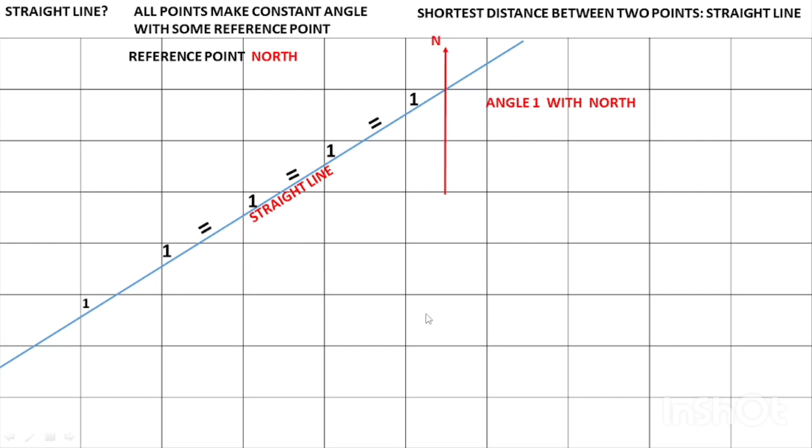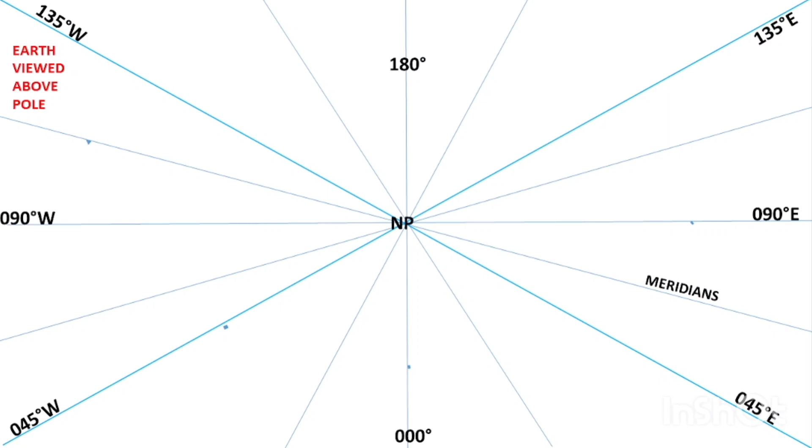If you are viewing the earth from above the north pole, it will appear something like this to you. You'll see the north pole and then all the meridians converging to the pole, because all meridians converge at the pole, and the parallel of latitude, which is a small circle, will be seen something like this.

I'm just taking some arbitrary points here. Point A I have taken as 50 degrees north parallel of latitude, and 135 degrees west longitude. Another point B, which is on the parallel of latitude of 30 degrees north and 135 degrees east.

The shortest distance is a straight line, so I'm drawing a straight line here. But if you look at it now, all the angles with north are different, they're not the same. So, as we just talked about, a straight line should be having a constant angle with north. So this is not a straight line.

So basically, it is not possible to draw a straight line on the surface of the earth. What you are drawing as a straight line is actually a curve. And the shortest distance now is on this curve, which is the arc of a great circle. A great circle basically is one which has got the maximum possible radius. So the shortest distance we can cover between 2 points is the arc of a great circle.

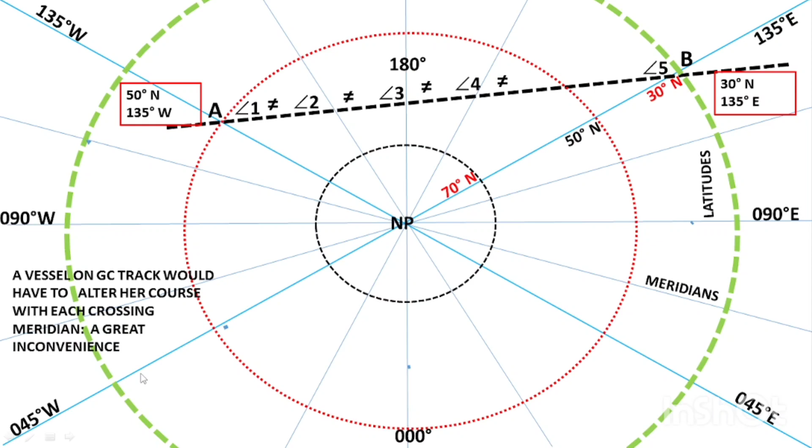Though there is an inconvenience in sailing along a great circle track, because you'll have to keep on altering your course with each meridian. As you keep on crossing each meridian, you'll have to keep on altering your course. But the considerable saving in distances overrides the inconvenience caused here. So you follow a great circle track when you are doing long distance sailing, to save on time and distance.

Now great circle sailing is a solution of an oblique spherical triangle, which is formed by the great circle track what you have drawn here. You have decided to sail between 2 points, and the meridians which pass through the 2 points which you are sailing between. So all the solutions for great circle sailing will involve solving a spherical triangle.

So solving of great circle sailing involves solving of oblique spherical triangles. And what is a spherical triangle? These are formed by the intersection of three great circles. Now, in this particular case, when we're talking about great circle, one of the sides of the triangle is the great circle track which we intend to follow between 2 points.

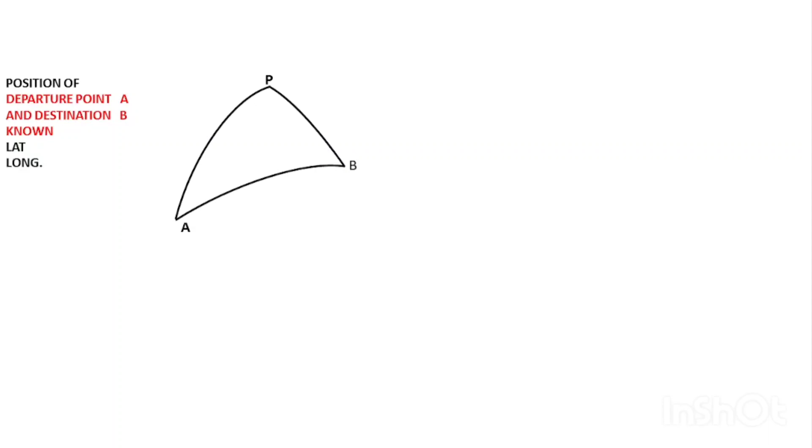Here, these are the 2 points which I've got, with the great circle passing through them. One side of the triangle is the side which we intend to follow, and the other two sides are made by the meridians which pass through these 2 points, A and B. And then we know the position of our departure, we know the position of our destination, that is our latitude and longitude.

Now, latitude we know is the arc of the meridian, contained between the equator and the place. So from equator to A is your latitude, and we know that from pole to equator is 90 degrees. So what is PA? PA is 90 minus latitude, right?

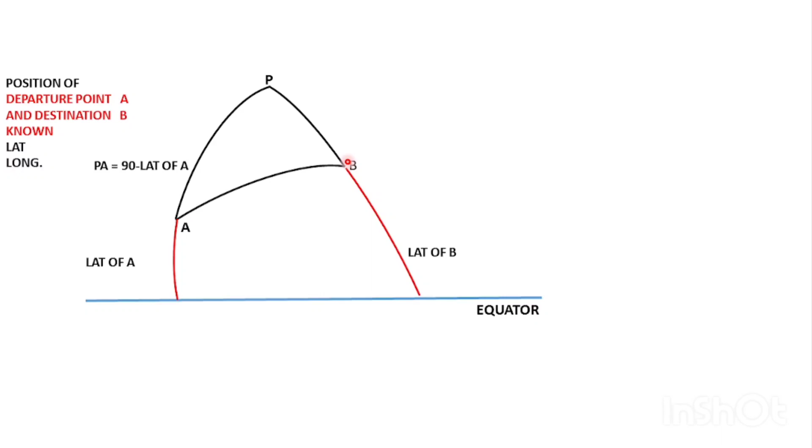Similarly, we know the latitude of B, which is from equator to B. So PB would be 90 minus the latitude of B.

This angle P, what we are seeing here, is the angle between the two meridians passing through A and B. So that is the D long between the two meridians. So angle P is the D long.

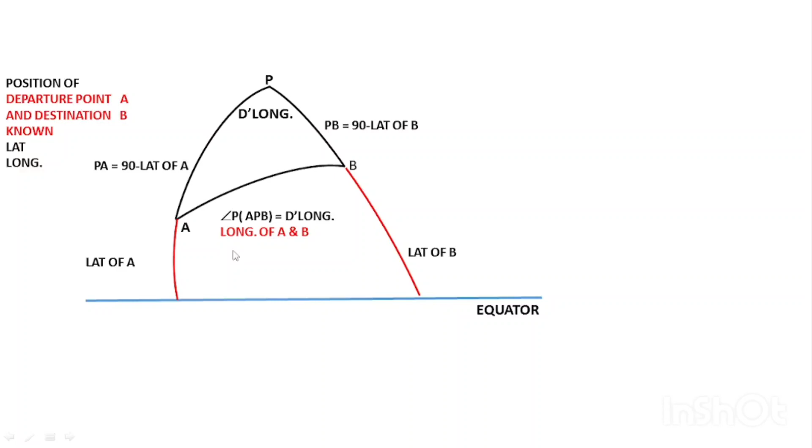Now we have this spherical triangle in which we know one side, other side, included angle. And then we can find out what is AB, which is the distance between the two points, the great circle distance. We can calculate angle A, which we use for finding out the initial course. And then I can find out angle B, used for finding the final course. Here I am specifically putting up that these are not your courses, these are just angles you have got after solving a spherical triangle.

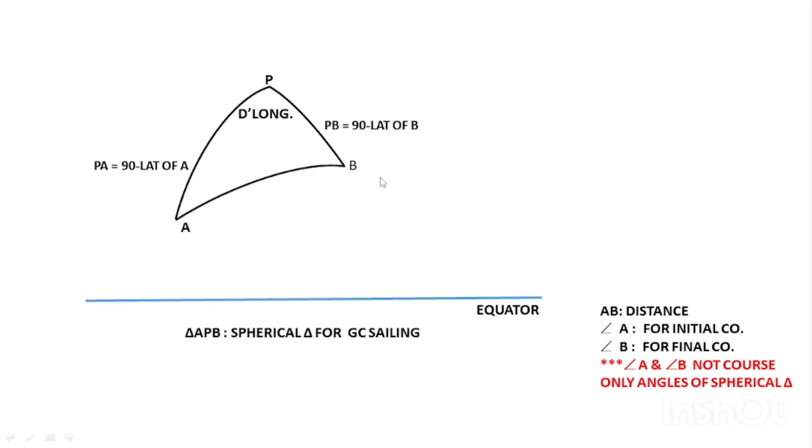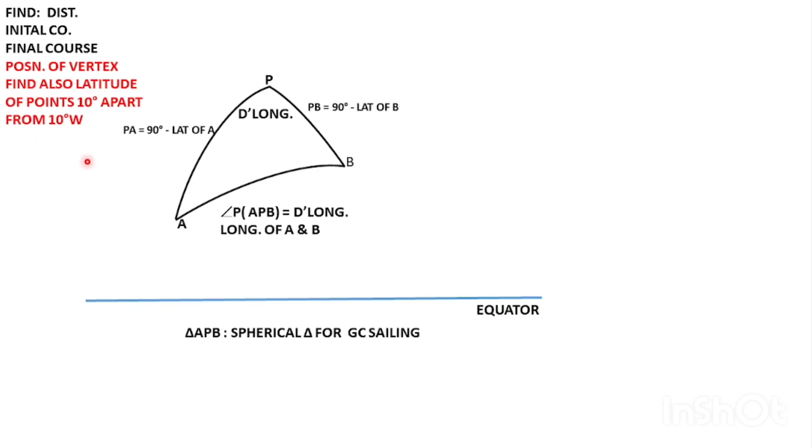Now, to find the questions here in great circle would involve finding the distance, finding initial course, final course, position of vertex, and latitude of some points 10 degrees apart. And here I've just written down 10 degrees west. This will be a full question which is there in great circle, solving for great circle sailing.

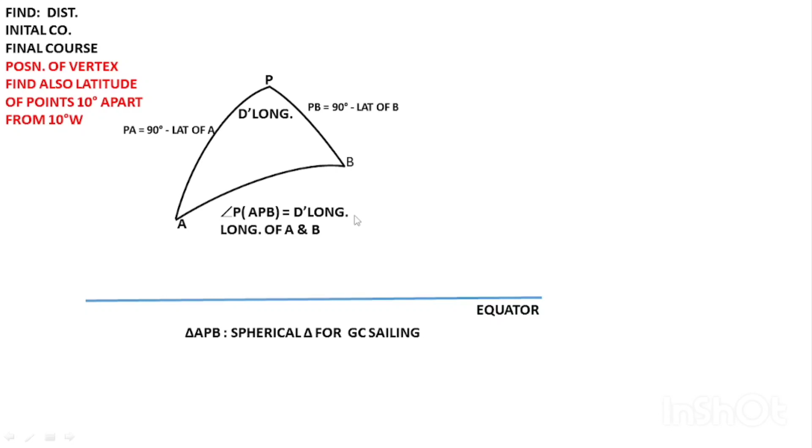Now just an example here, what I'm giving you is that I'm sailing from A to B. The positions are given, I'm going from 10 degrees north to 47 degrees north, 17 degrees west to 89 degrees east. So my DLAT, I start off with calculating my DLAT. So my DLAT and D long is north and east.

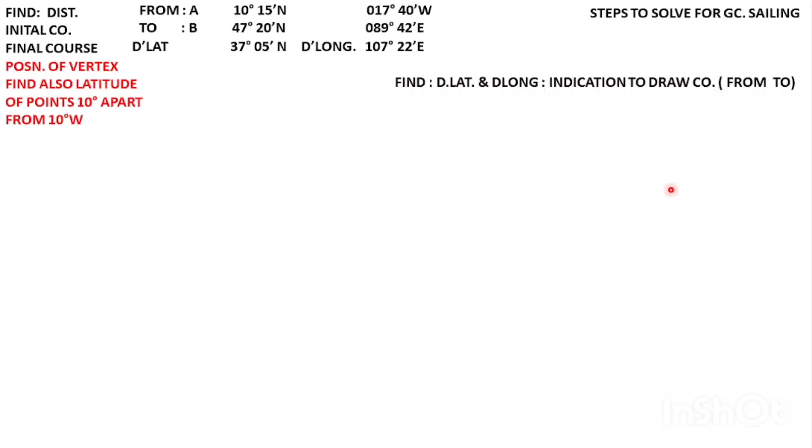Now always find out your DLAT and D long, because that gives you an indication on how your track is going, which direction you should draw your course on. So here it is northeast, so I would just draw something like this in the northeast quadrant.

Then the next step is I use the pole to draw the spherical triangle. I use the pole on the side which has got the higher latitude, and higher latitude here is north. So I will use the pole north, and then I can pass the meridians through A and B.

Now I know the latitude of A, which is 10 degrees. So what remains of PA is 90 minus the latitude.

Similarly, on the other side, the latitude is given to me as 47 degrees north. So what remains here on top, PB, is 90 minus the latitude of B. And as we said, angle P is the D long between the two meridians. So that's my longitude, D long, here. And now I'm ready with the spherical triangle to solve.

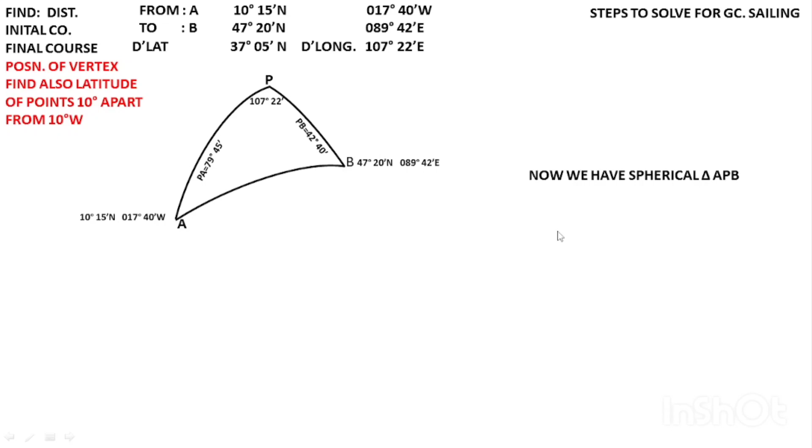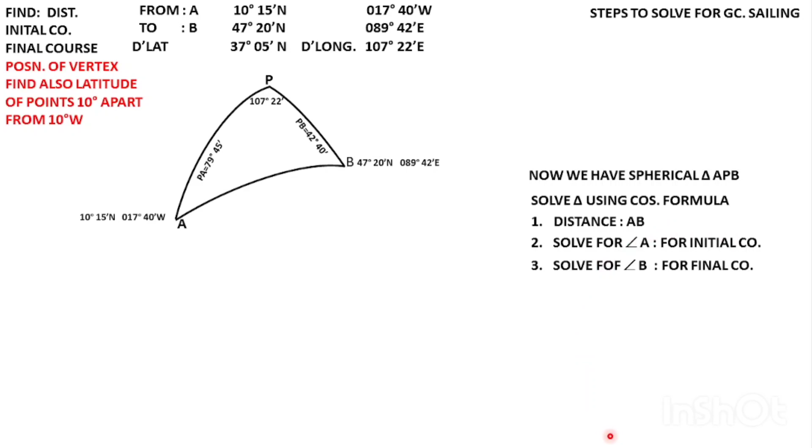Now this solution, you could use the cos formula. So what you've got to find out is AB, your distance. Then you solve for angle A and angle B for finding out your initial course and final course. Angle A and angle B is not your course. How do you name your initial course and final course?

Which is, come up here, initial course and final course. You use the name of the elevated pole. Elevated pole is the pole you have used for drawing this figure, and here you have used north pole. So initial course would be named north. And what is your D long? East. So whatever angle you have got here, A, the initial course would be elevated pole and D long. In this case, elevated pole is north, D long is east, initial course would be northeast.

The final course is named opposite the elevated pole. So here I use north, opposite is south, and D long. So this is the easiest way of naming your course, you will never go wrong as long as you remember this.

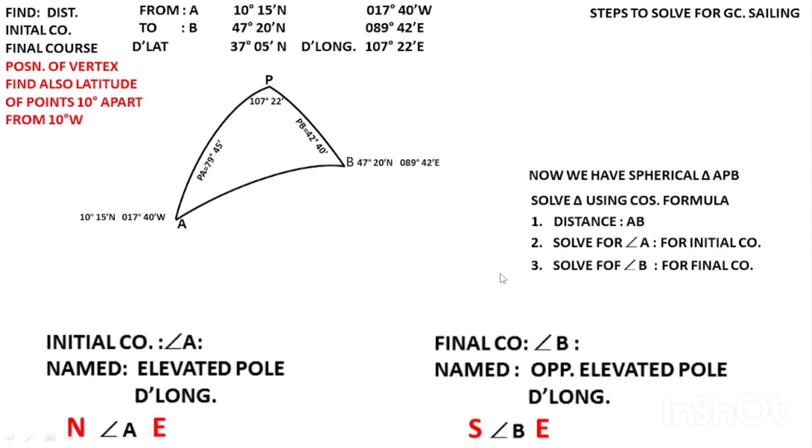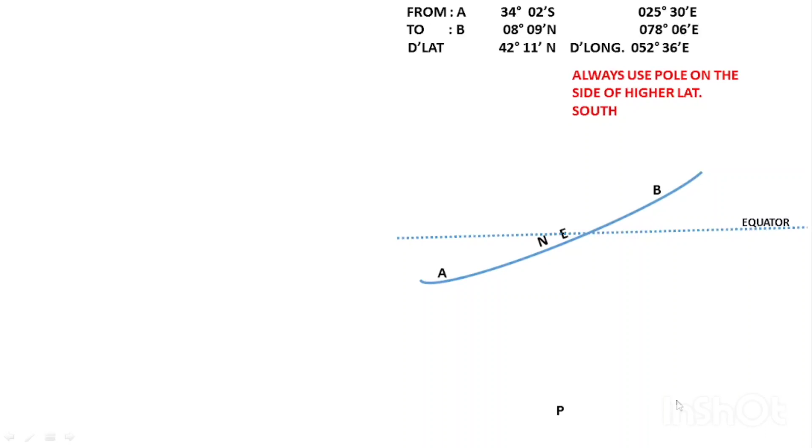This equator and other things I'm showing is only for you to understand. Once you have understood what is PA and PB, you need not draw all this, just to clarify it for you. Now latitude of A is south, so you're south of the equator. So what is left of PA? We know from pole to equator is 90, so what is left behind is 90 minus the latitude of A.

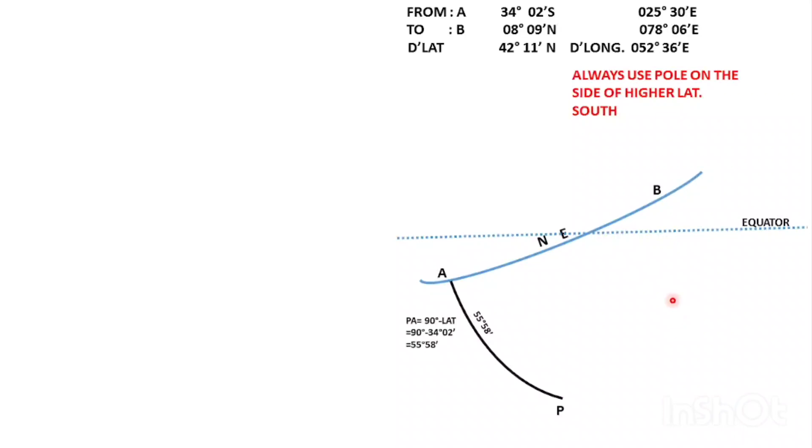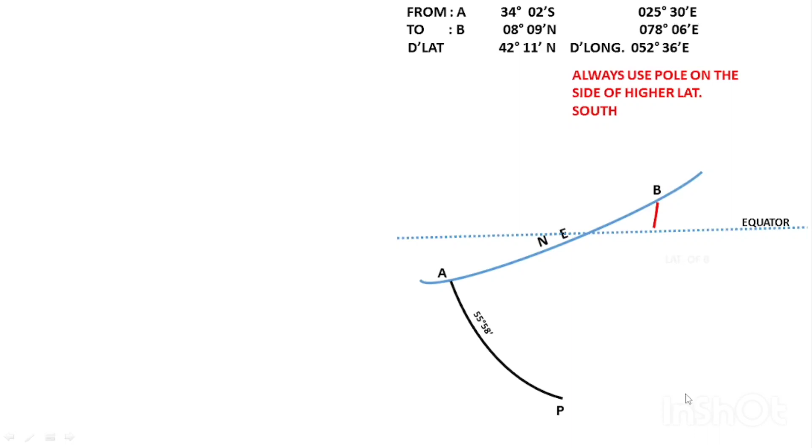Now for PB, my latitude is north this time, 8 degrees north. Now from P to equator is 90, so definitely PB has to be 90 plus. So PB is 90 plus, and angle P is the D long.

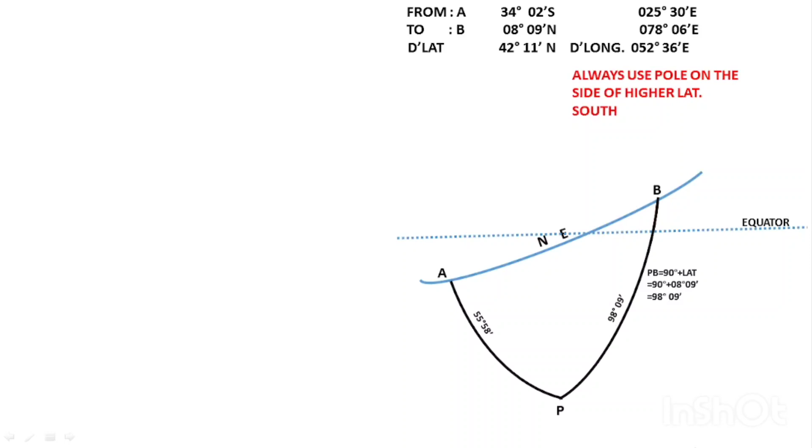Now you've got to solve for AB, that's your distance. Angle A is your initial course because you are starting from A, and angle B is for finding out your final course.

I have taken the values of 120 as my angle A, angle B is 46 degrees, and the distance here is 3914, which I have calculated, though I have not shown you the calculations here.

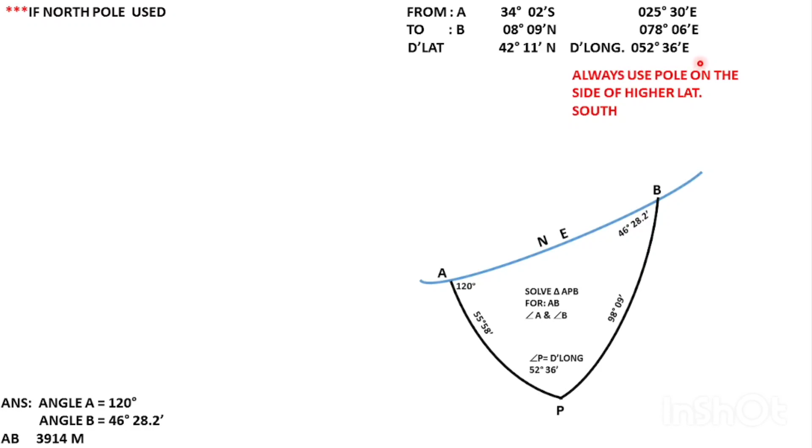Now if I had used north pole instead of south pole, as we said, here the course would be south because I am using south pole and east. It will be south 120 degrees east, which is 180 minus 120 degrees, 60 degrees, right?

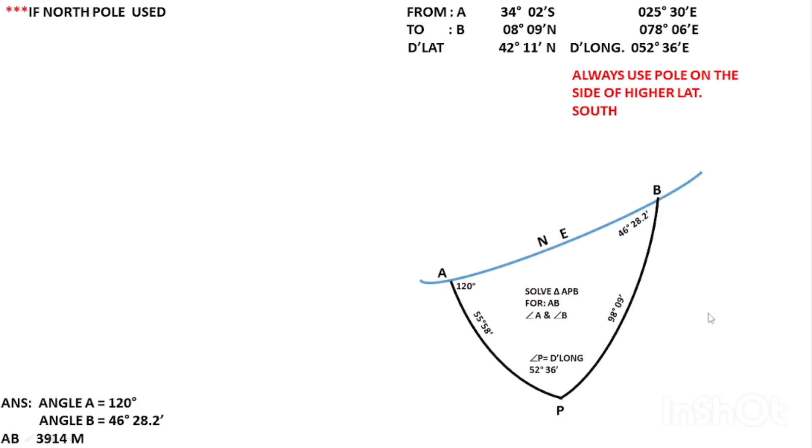And in this case, the course would be opposite, that is north, northeast, 46 degrees. So final course would be north 46 degrees east, that is 46 degrees east, in case I have used the North Pole for calculation.

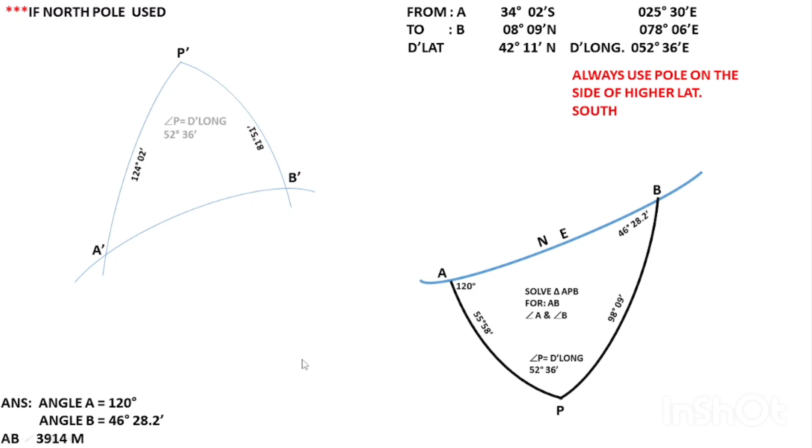Now if you see, A is south, so the latitude has gone below the equator, so PA would be 90 plus, as we had seen here, and PB would be 90 minus. And the D long will remain the same because these are two meridians, the longitudes are the same.

Now these values are supplementary. 180 minus 55 will come up to this. 180 minus 98 comes up to this. They are supplementary sides now, 180 degrees apart.

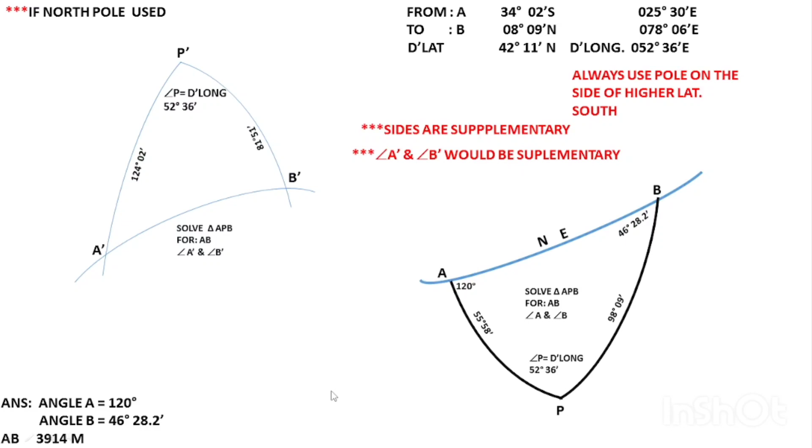If you solved this triangle using North Pole, your answers would be supplementary to this. That is, angle A would come to 60, and angle B would come close to 134. So these are also supplementary to the angles what we have calculated.

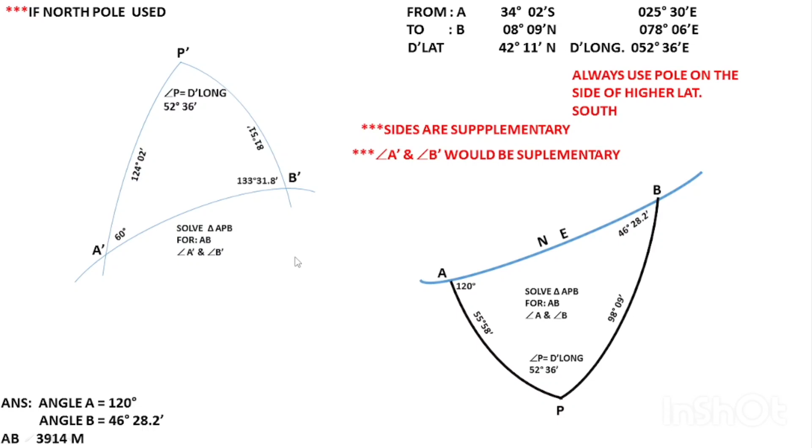So true course basically when we talk about it is measured from north to the ship's head. The ship is going from here, again north to ship's head, and that's why I said it is making an angle of 120 from south. So from north it will be making an angle of 60 degrees.

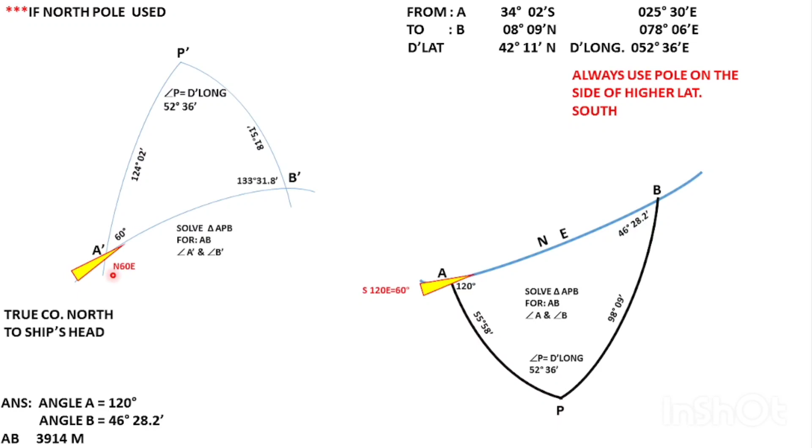So here when I said it is south 120 degrees east, that means it's 60 degrees true course. And here when I calculated, I have already got the angle as 60. And the pole I had used was north, so I got the answer northeast here.

Similarly for B, the angle what makes with north is 180 degrees minus this value. Yes, and this is what we talked about as the final course.

And here also it is the same thing because these two are vertically opposite angles. So you have the final course as opposite of the pole, which was south, and D long was east, so northeast. So you have the same angle here and here. So calculating either way, you are getting the right answers as long as you are able to put the direction of the courses correctly.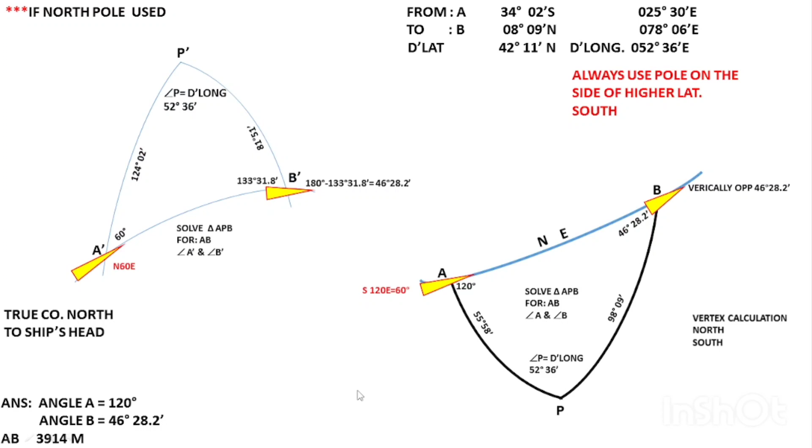But the problem with solving one or the other is this: when we talk about calculating the vertex, we'll talk about what is vertex. Vertex is actually a point which is closest to the pole. Now if suppose I was calculating the vertex here, I would be calculating a point which is closer to the North Pole, whereas here I'll be calculating a point which is closer to the South Pole.

And that is where you might make a mistake. Because you see, I am going up to 34 degrees, starting from 34 degrees south, and here I am going only up to 8 degrees north. So I'm not bothered how high I am going in the northern latitude, I'm more bothered about how high I am going on the southern latitude.

So it would be preferable, always advisable, to use this triangle rather than this. So always remember, this is the right diagram, this I consider to be wrong. So always advisable to use the pole to draw a diagram which has got a high latitude.

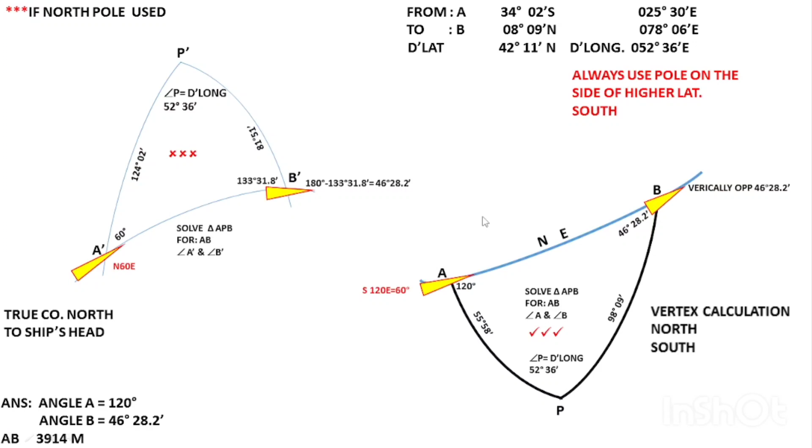Now this is question number 1 which I am solving for you. This question could come up to you as a great circle question, asking to find the distance, initial course, final course, position of the vertex, and the points every 10 degrees apart from 10 degrees west. I will take it up step by step here.

I will start off with finding out the distance, initial course and final course today. So I start off with my DLAT and DLong, and I've got my DLAT as north and east, so I am going somewhere northeast. Your DLAT and DLong is an indication of which direction you are going to be heading. To draw your diagram, I've just drawn this diagram northeasterly here in the northeast quadrant.

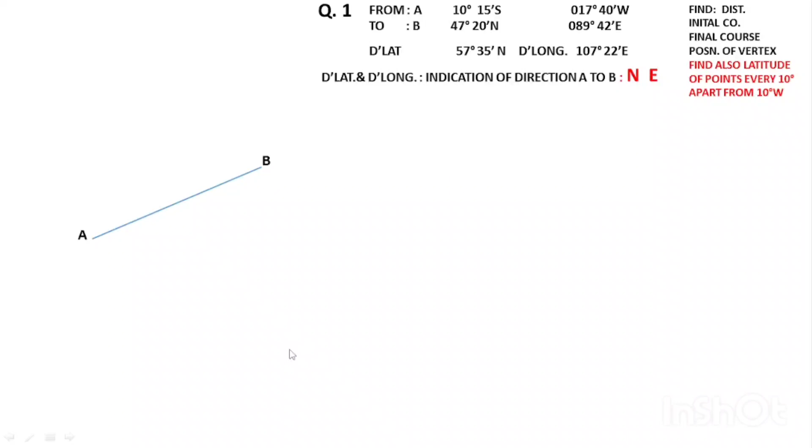Here the higher latitude is north, so I will use the higher latitude pole on the higher side, that is north pole. And then I can draw meridians through A and B, and now I have the spherical triangle which I have to solve.

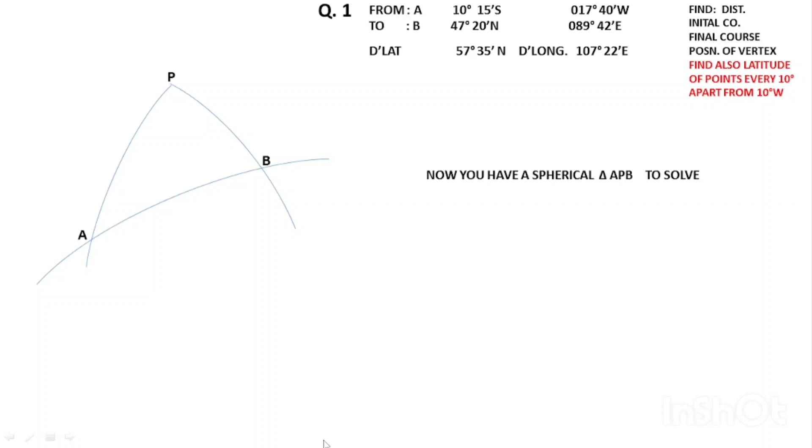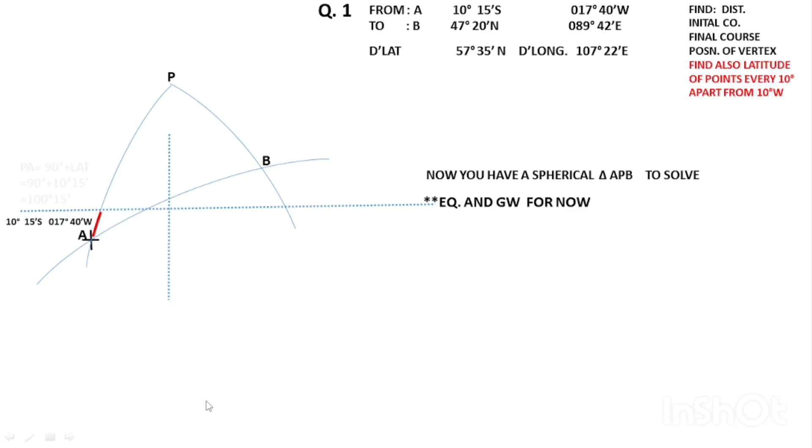Now the only thing is I have to find out what is what. So what is PA? I know that the latitude of A is 10 degrees south, that means A is 10 degrees south of the equator. So my PA would be 90 plus, as you can see I am crossing the equator, and from pole to equator is 90 plus. I got my PA there.

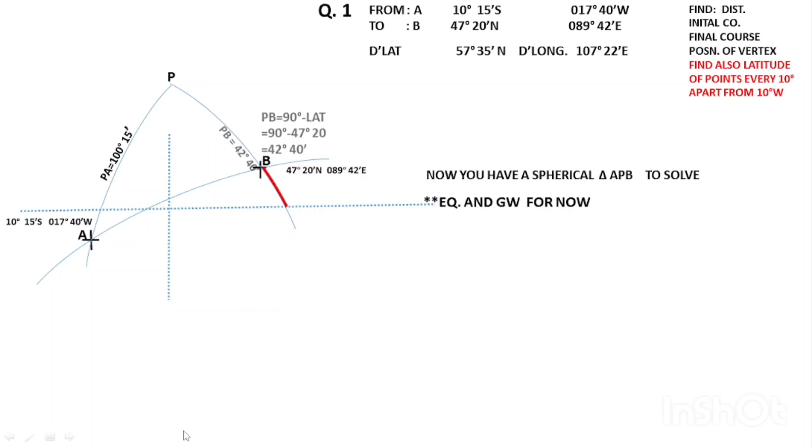Similarly, for PB, I'm on the northern latitude, so my PB would be 90 minus. And angle P is the D long. And I'm ready with the spherical triangle to solve for AB, angle A and angle B.

Now these can be solved using cos formula, Haversine formula. I've written down the azimuth ABC tables, what we call them, which involve again the formulas of tan for A and tan for B and other things. Today I'm just going to be talking about cos formula only. Maybe in some other class I'll talk about Haversine and the ABC tables.

I'm not very sure about the use of ABC tables for the examination part of it, but I'll give you an idea how to use the tables or how to go about calculating with ABC tables. Definitely I'll come back to Haversine because Haversine is a formula which would be more suitable for most things. But today we'll talk about cos, because nowadays with you fellows having your calculators in front of you, normally you won't go into the tables, and even Haversine you could calculate with the cos formula. But today I'll restrict myself only to the cos formula here.

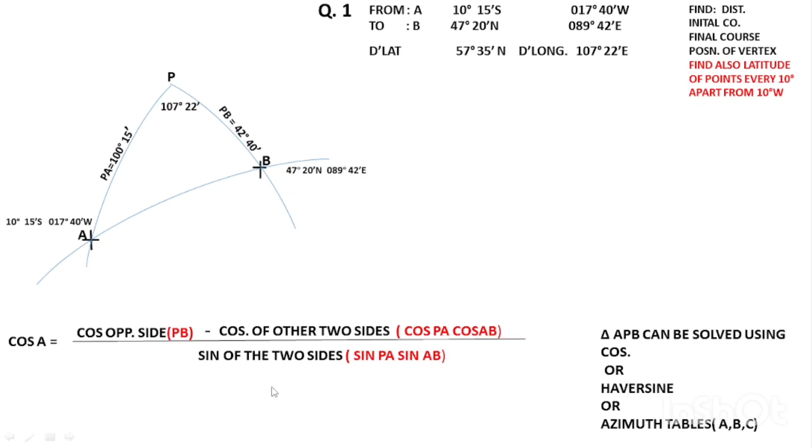Very simple to remember. I'm repeating it for the other two angles also so that it is clear in your mind. You don't have to mug it up as long as you can get it into your head. So let's talk about the next angle here, angle P. Now when I'm talking about angle P, the side opposite is AB. I will write down next, cos of AB. And then what is remaining? This side and this side. I write down minus cos of the other two sides, and divide it by the sine of these two sides, PA and PB.

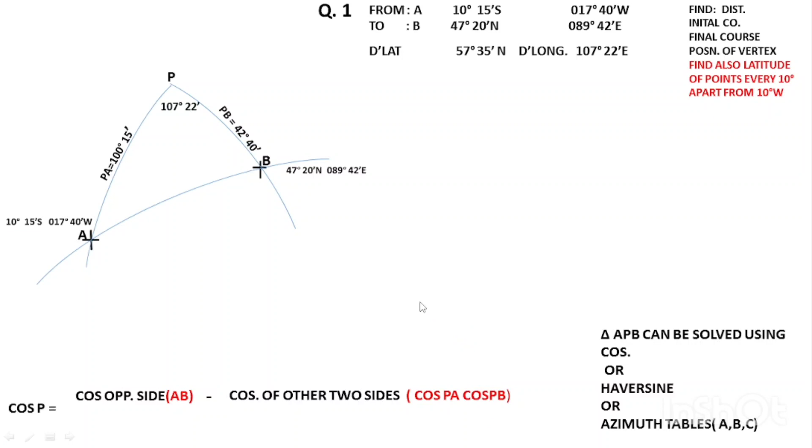Similarly, suppose we talk about angle B, side opposite, the remaining two sides, and divided by sine of the remaining sides. Simple to remember, easy to use with your calculators.

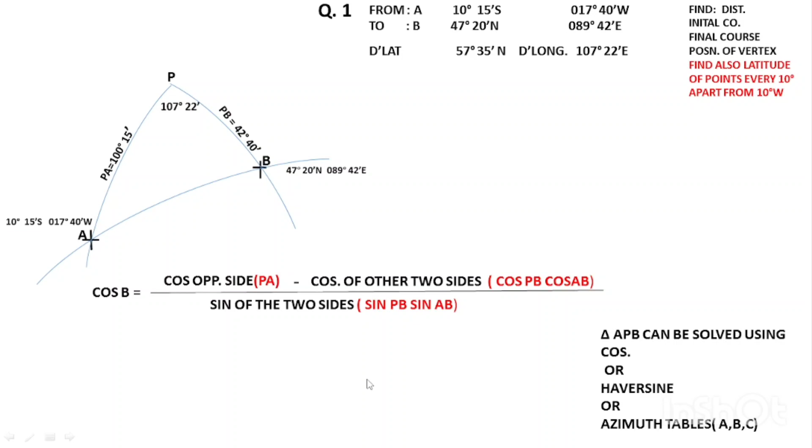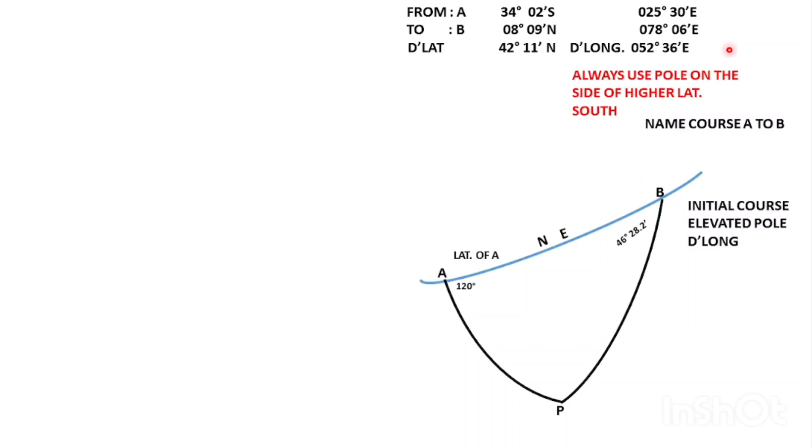So now this just gives you an idea about how to go about naming your course, once again, before we get down to solving the thing. Now to name the course A to B, that's your A to B. If you're going A to B, this is your initial course. To draw, use the pole which has the higher value, south. Initial course would be south pole and the D long, it will become southeast. And the final course is opposite the elevated pole, and D long. Elevated pole is the south. So opposite is north, D long is east, northeast.

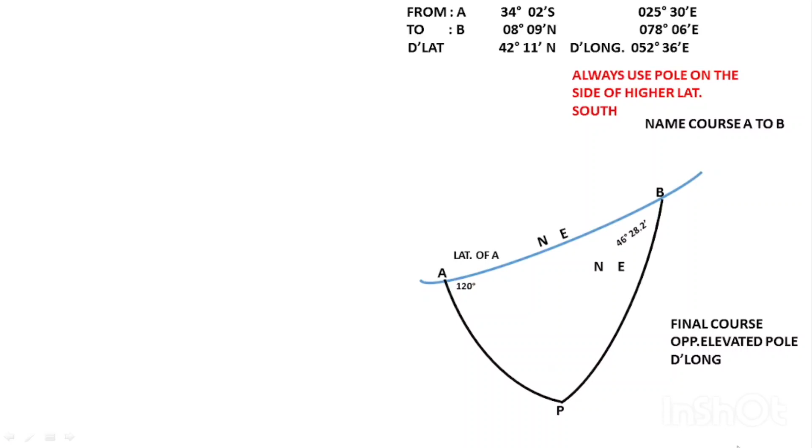Always place your ship's head on the point where you are starting from. I put my ship's head here. Now the course is always measured from north. What is the angle it is making from north? This line is 180, from pole to pole, 0 to 180. It is making an angle of 60 degrees, so initial course would be 060.

Another property of a spherical triangle is that vertically opposite angles are the same. So the angle formed here with the north pole, B, and the ship's head would be the same as 46 degrees here, and that would be the angle we are making with north. So my final course would be north 46 degrees east.

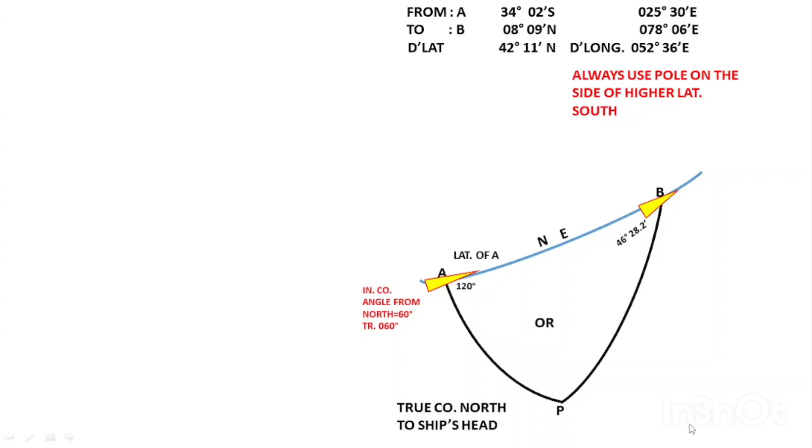Now the same position, but I'm just changing the direction. Instead of going from A to B, I'm coming from B to A. Values will be the same. So my D lat and D long is going to just change from north to south and east to west. So I'll be going something like this.

Now if I put the southwest D lat and D long, I place the ship's head here where I started off from. What is the angle I'm making with the north? 180 plus 46 - isn't it? That's the head, that's the angle I'm making with north. So initial course would become 180 plus 46.

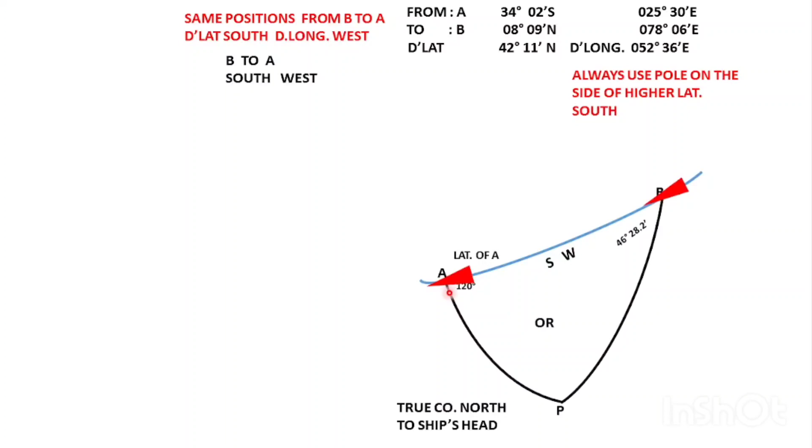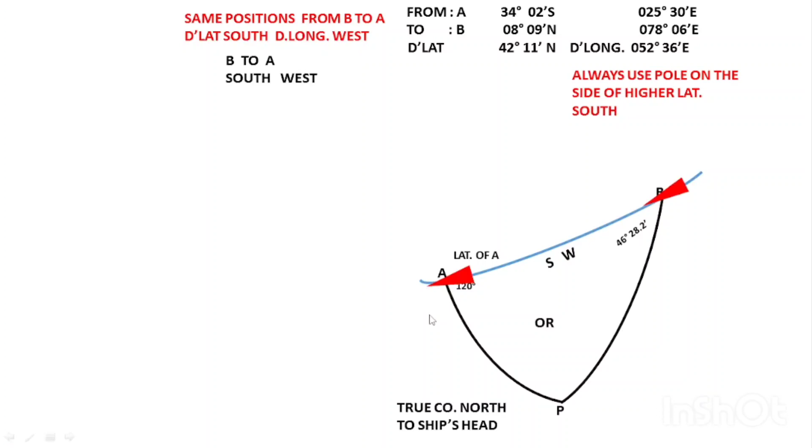And similarly, for the final course here, this was vertically opposite angle. This is 120, so from north I'm making an angle of 120, so it will become 360 degrees minus 120. So initial course has become 180 plus 46, and the final course is 360 minus 120, which is 240.

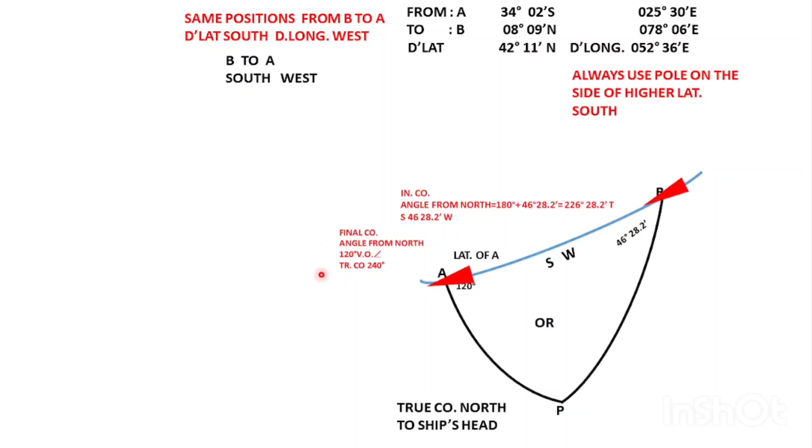I would rather, if this is also clear to you it's good enough, but remember if you can just put it with the right pole there and remember it: initial course is elevated pole and D long, final course is opposite elevated pole. You'll never make a mistake.

Now this is a question given to you, I'm solving it for you just to show you the steps, how you go about doing it. Though my calculations are not fully shown here, so I'll expect you to show all the calculations with all the values whatever is required. So do not just follow my calculation, this is only for your understanding.

So I start off with angle P: cos P, side opposite AB, the other two sides remaining, cos of that, and sine of the same two sides here.

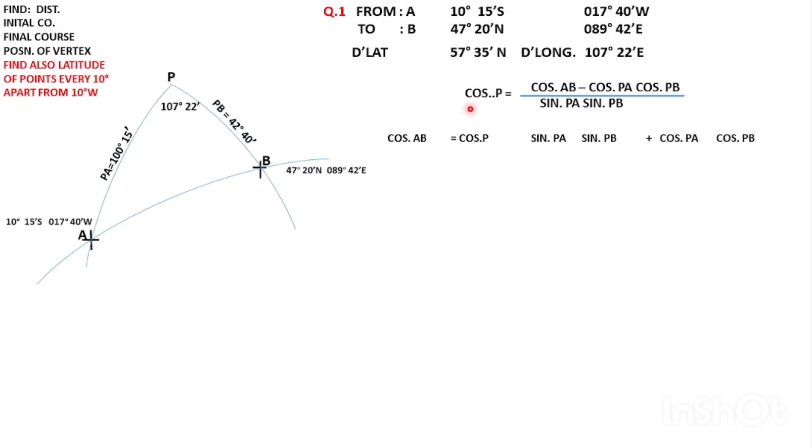So here I am finding out AB. I have cross multiplied, transposed it to this side, and got this value here. Put in the values - as I said, I'm not showing you all the steps and values here, I have not put the values here. You go ahead and show them, and you get AB as the distance AB.

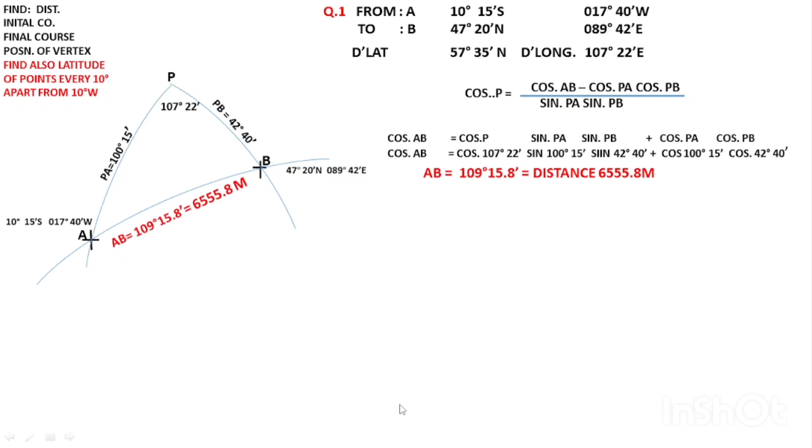Here again I say please show full calculations. Now for initial course, I'm going to find out angle A. What is opposite angle A? PB. What are the two sides that are left? PA and AB, and sine of this.

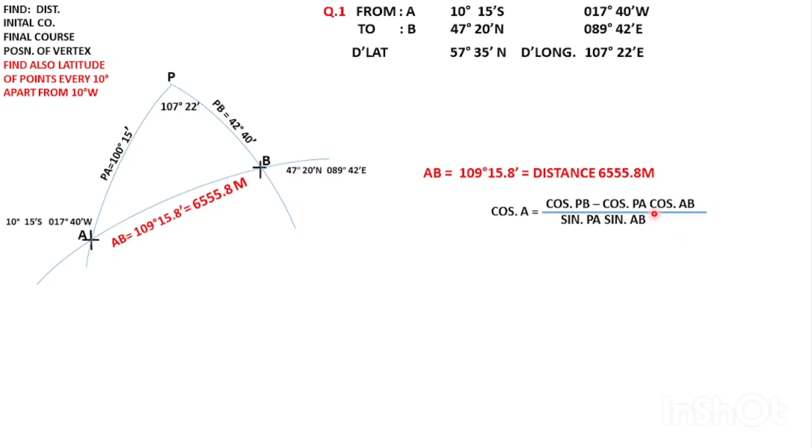Put the values and you get the answer: angle A is 43 degrees 15 minutes. And how to name it? The pole, elevated pole, north, and D long, east. So your initial course would be northeast.

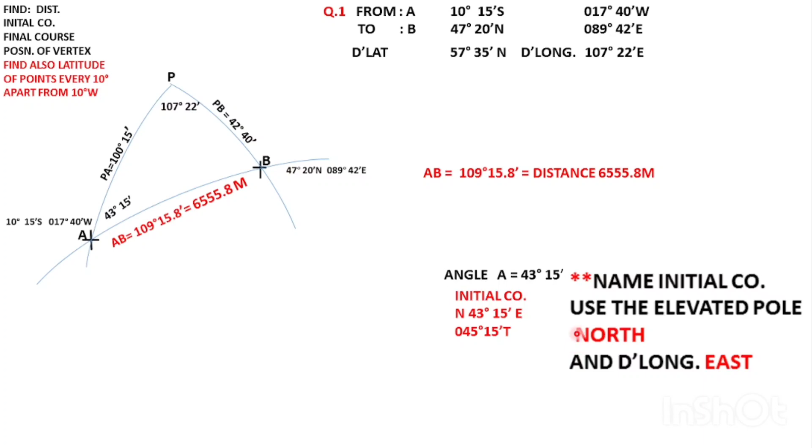Now the next step is to find out angle B, for finding out your final course. Opposite B is PA, the other two sides remaining are PB and AB, and sine of them. Put the values - angle B is 84 degrees.

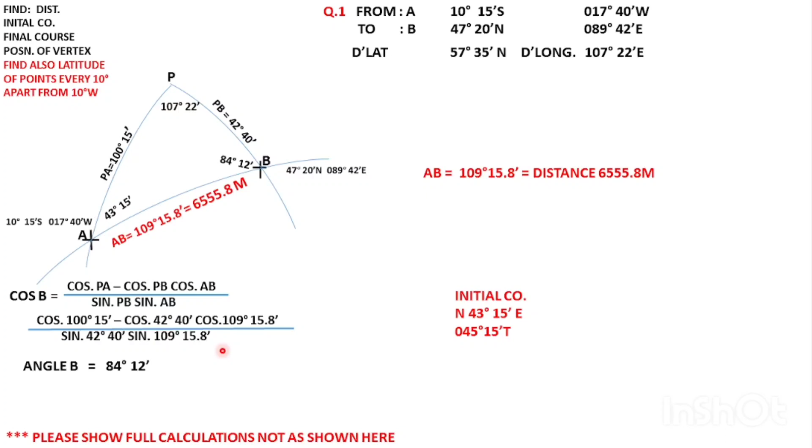As I said, change the name of the pole you used for drawing, make it opposite. You used north, it becomes south, and the D long is east. So your final course is southeast.

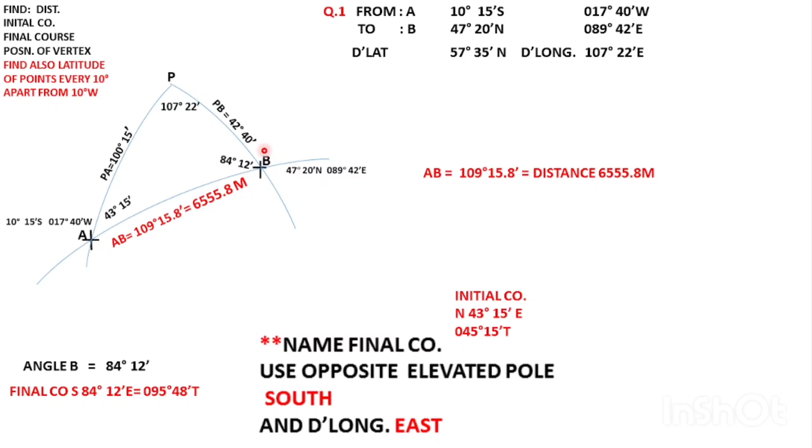84 12. Now if you just visualize putting your ship's head here, with the ship's head it will make an angle of 43 degrees. When you are crossing here with the ship's head, this is 84 degrees, this is the vertically opposite angle here, so it will be making an angle of 180 degrees minus 84 degrees, which amounts to the same value. So it's up to you how you want to do it.

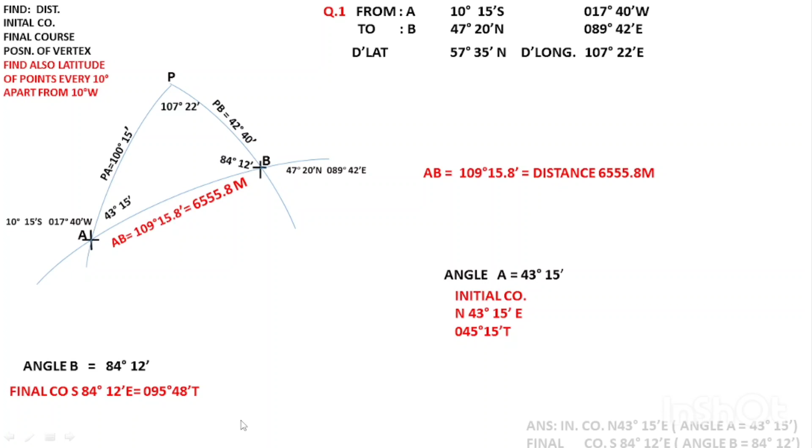I find this an easier way to do it. Now I have got what I have calculated here: I have calculated the distance, I have calculated angle A and angle B, and of course converted them into initial course and final course. So I have taken care of the first three things here: distance, initial course, and final course.